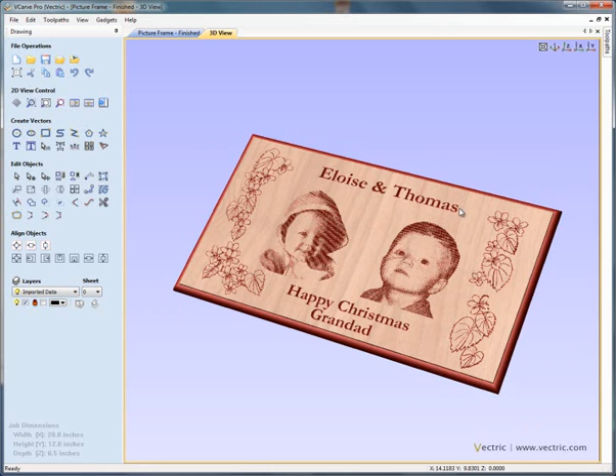We're going to start the project with a VCarve Pro or Aspire project that's already got some vectors laid out. If we look at the toolpath tab in the three-dimensional view, we've also calculated some toolpaths to engrave the text, to add a decorative border, and to actually cut the piece out.

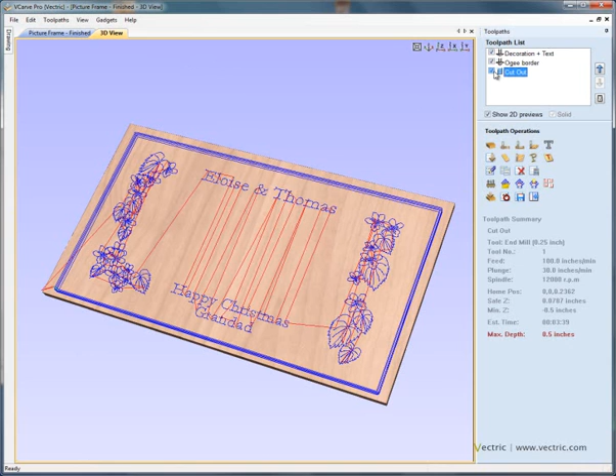If we just preview all of those toolpaths for the moment, this shows us the decoration that we're going to engrave and the text that we're going to engrave onto this plaque, and finally cut it out. If we delete the waste material, that leaves us with the finished plaque.

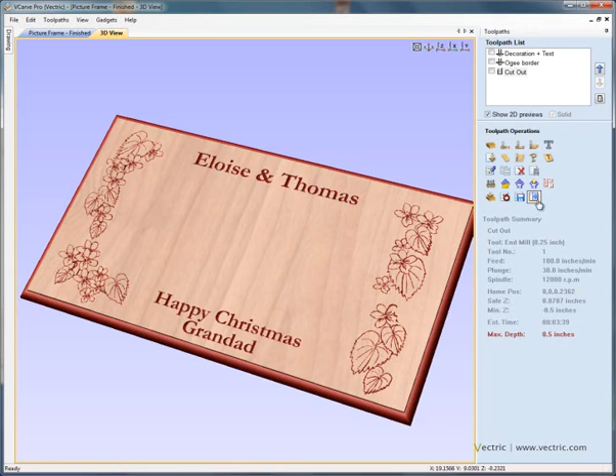If we go back to the two-dimensional view, toggle back to the two-dimensional view, we could use the option to tile the views horizontally. So here we've got the two-dimensional vectors and the three-dimensional plaque underneath.

If we start Photo VCarve now, here we've got a photograph of a little boy that we've got opened. We've actually modified this image using Photoshop or CorelDRAW or a paint package. We've painted the background away with a solid yellow color. I'm going to make the background transparent, click on the yellow, and that's gone.

What this does is limit the Photo VCarve engraving toolpath to inside the silhouette of the child's face. Now we go to set the material size, which is quite important.

Here we're setting it to be 6 inches, and it's automatically going to scale the height to be the same, so 6 by about 5 and 3/4 inches. This is the size we wish to engrave the photograph of the child inside VCarve Pro or Aspire. We'll set the material thickness to be 1/8 of an inch with Z0 on the material surface, and apply.

Next, set the cutting parameters. Here we're going to select the tool to engrave this. We recommend using a 60-degree engraving bit with a very fine point on it. We're going to engrave the depth for the photograph to 40 thousandths deep, with a 120% step over. Calculate the toolpath.

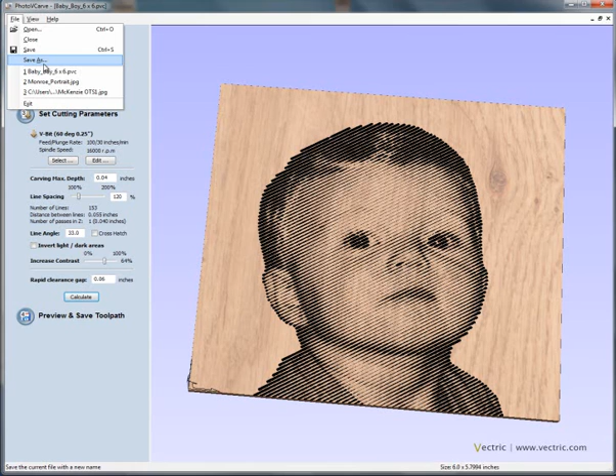Photo VCarve has automatically created a toolpath for us, and we're now going to take this data and import it back into our existing VCarve Pro project. If we say File, Save As, give this file a name. Here we'll say Baby Boy 6x6. We'll say yes.

Let's go and open the photograph for the baby girl. So here we've got the baby girl project. If we look at the photograph, switch off the background color for a moment, we've done the same thing. We've painted around the baby's silhouette with a solid blue color. If we then make the blue transparent, we go through the same process.

Let's make this 6 by 6 inches. It doesn't really matter about the material thickness, but we'll make it the same, so 1/8 of an inch, and apply. Calculate the cutting parameters. Let's make this 40 thousandths deep as well. Calculate. That calculates the engraved photograph for us.

So we're going to save this project. File, Save As. We'll make this Baby Girl 6x6, overwrite that file. Now if we just had Photo VCarve, we could go on to preview and save the toolpaths, selecting the post processor. Let's say we've got a G-code based control system. We could save the toolpaths and run them on the machine. But that's not what we're going to do here.

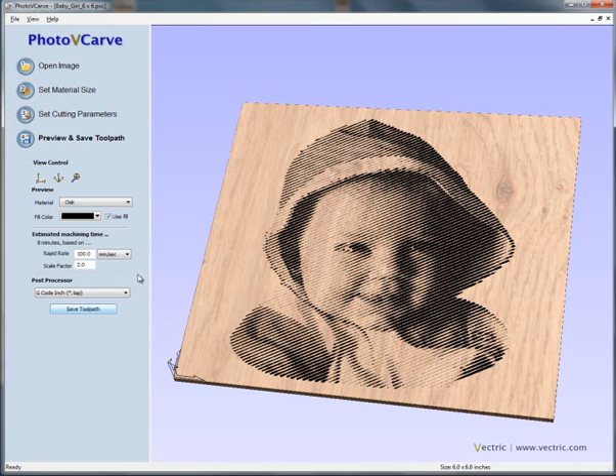Just going to close Photo VCarve for a moment, go back into VCarve Pro. Remember, this could also be Aspire. We're going to go to the import file option, File, Import. Here we've got the option to import the usual vector data, but we can also just import Photo VCarve files. So here we've got the image or Photo VCarve file for the baby boy.

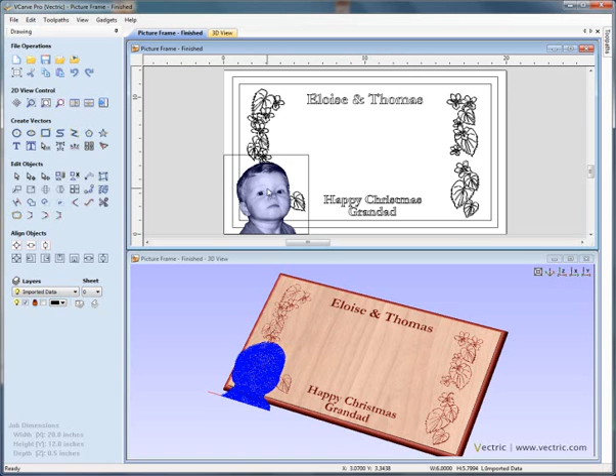Import this. You'll see in the two-dimensional view the photograph, or the grayscale representation, appears as it was machined inside Photo VCarve. If we click twice on the photograph, we can now click and drag and move the silhouette or the preview image to where we want it in the two-dimensional view.

You'll notice as we move this, if we move it to the right hand side here, the toolpath is also moving in the three-dimensional view.

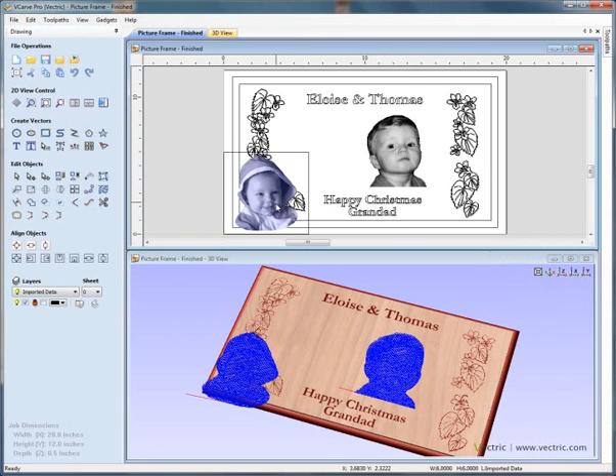Let's import the other Photo VCarve project, the baby girl. Again, this comes in the bottom left hand corner. Click twice, click and drag with the left mouse button, position where we want this photograph to go, and we'd like it to go there, just on the left.

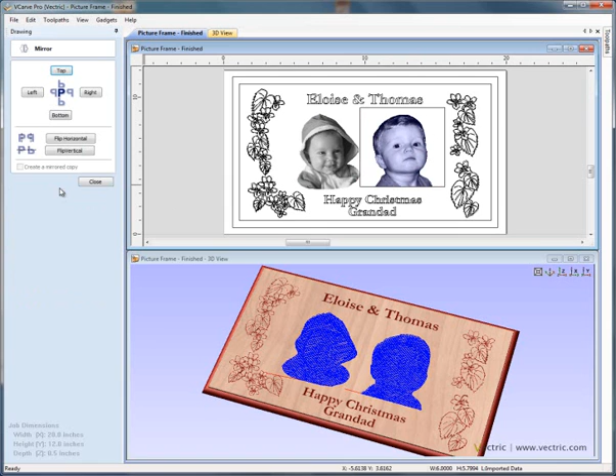Now I think it would be nice if the little boy was facing the little girl, so I'm going to click, move it slightly to the right, click, and we can use the mirror options. Mirror, flip horizontally, and you'll see that as I did that, the grayscale image flipped to the left, but the toolpath also flipped. If we flip it back again, notice the way the toolpath flips with the preview.

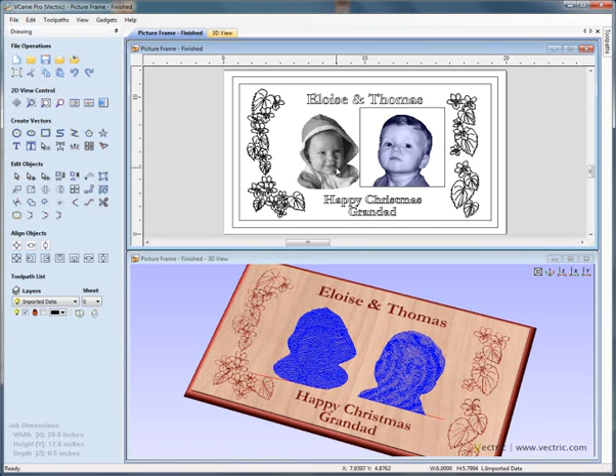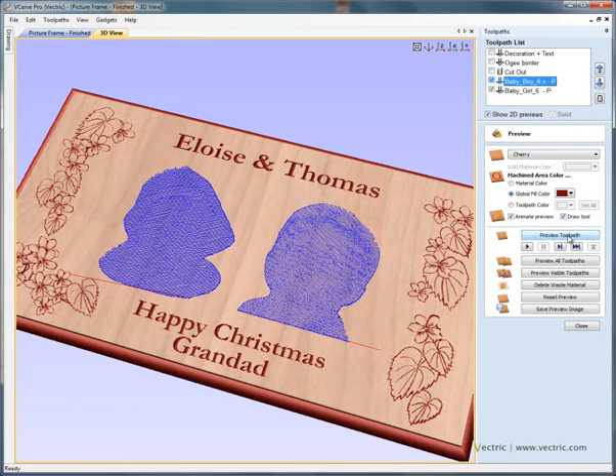We've imported the Photo VCarve files. This is actually imported just the toolpath data. If we now swap from the drawing tab on the left to the toolpath tab on the right, and maximize by double clicking on this view, you'll see we've got the toolpaths there. We can preview these toolpaths, so preview the baby boy, select the baby girl and preview that toolpath.

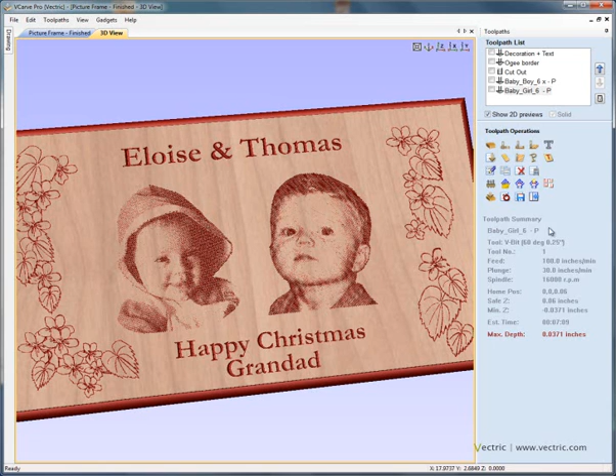So, very quick and easy to take the results or the files from a Photo VCarve project, import them into VCarve Pro or into Aspire, move the data around so that it sits on a plaque or is in the right position relative to other toolpaths. Once you've done that, you can save each of the toolpaths, select the post processor, select them all in turn, and all of the toolpath data will be relative to the original origin, the original XY origin on your original project.

I hope that's interesting and you found the project useful. Thank you.